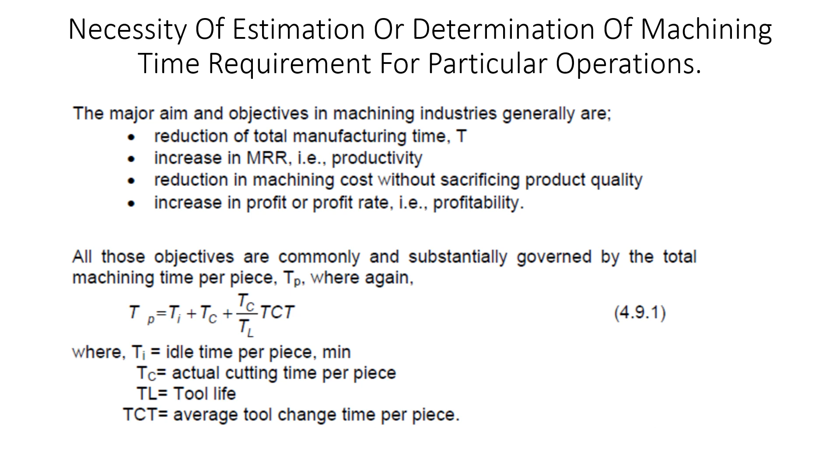Hence, it becomes extremely necessary to determine the actual machining time TC required to produce a job, mainly for assessment of productivity, evaluation of machining cost, measurement of labor cost component, assessment of relative performance or capability of any machine tool, cutting fluid, or any special or new technique in terms of saving in machining time.

The machining time TC required for a particular operation can be determined using two methods: first, by roughly making calculation, that is estimation process, and secondly, precisely if required, by measurement. Measurement definitely gives more accurate and detailed results but is tedious and expensive, whereas estimation by simple calculations, though may not be that accurate, is simple, quick and inexpensive.

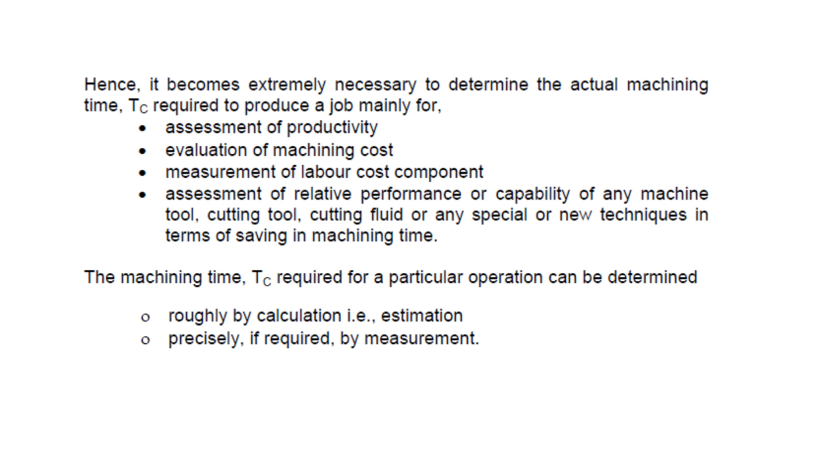Hence, determination of machining time, especially by simple calculations using suitable equations, is essentially done regularly for various purposes. Now coming on to major factors that govern machining time. These factors will be understood from a simple case of machining.

A steel rod has to be reduced in diameter from D1 to D2 over a length L by straight turning in a center lathe, as indicated in figure 4.9.1.

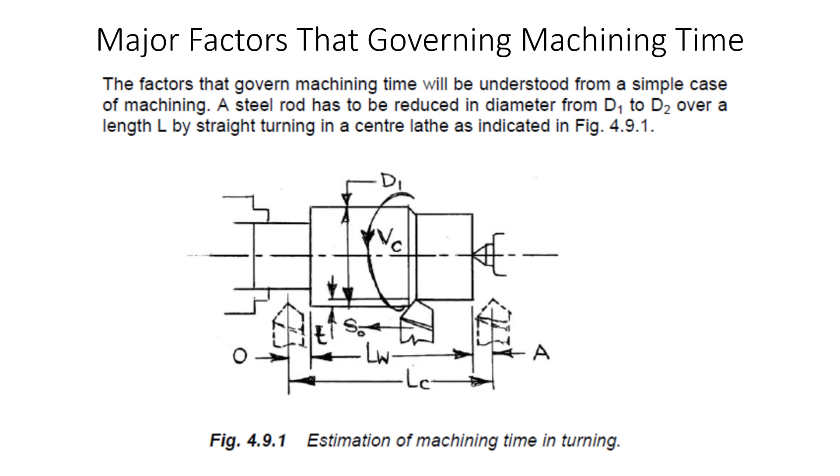Here Tc, the cutting time, is given by Lc by N into S0 into Np, where Lc is the actual length of cut, given by L plus A plus O. A and O are the approach and overrun as shown in figure 4.9.1. Approach is the position where the tool is kept prior to starting any machining operation, and overrun is the length which the tool moves after the part has been cut.

Here S0 is the feed given in millimeter per revolution, and Np is the number of passes required for the diameter to be reduced to D2 from D1. Speed is determined from cutting velocity Vc, given by pi dn by 1000 meter per minute, where d is the diameter of the job before cut. Therefore n, or the RPM, is given by 1000 into Vc by pi into d, the diameter of the workpiece. The number of passes Np is mathematically determined by Np equals d1 minus d2 divided by 2t, where t is the depth of cut in one pass, given in millimeters.

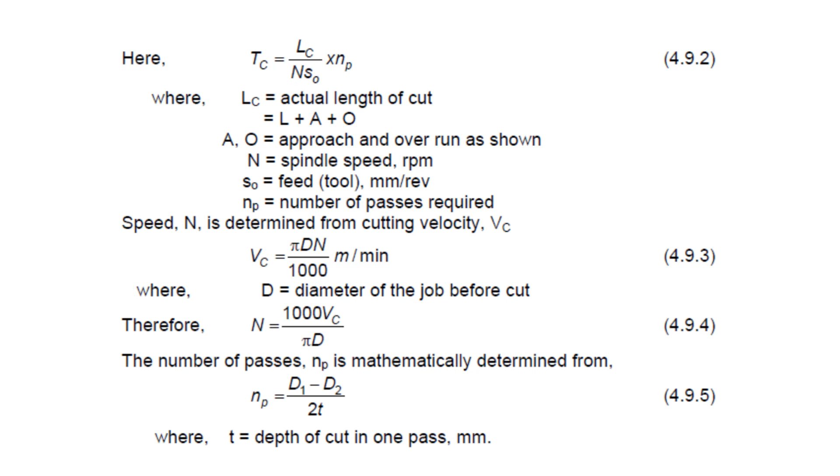However, combining equations 4.9.2, 4.9.4 and 4.9.5, one gets Tc equals pi dLc, d1 minus d2, divided by 2000 Vc S0 T. And for single pass turning, Tc can be written as pi into d into Lc, divided by 1000 into Vc into S0.

Equation 4.9.7 clearly indicates that for turning a given diameter and length, the cutting time Tc is governed mainly by the selection of values of cutting velocity Vc and feed S0. This is true more or less in all machining operations done in different machine tools.

A number of factors are essentially considered while selecting or deciding the values of Vc and S0 for any machining work. The major factors considered for selecting Vc are: first, nature of cut; second, work material, its type, strength, hardness, heat resistance, toughness, chemical reactivity, etc.

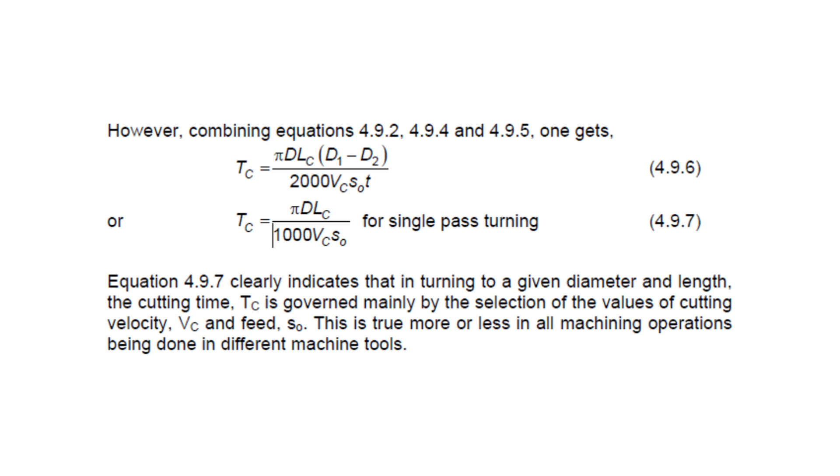Then cutting tool material, its type, strength, hardness, heat and wear resistance, toughness, chemical stability, thermal conductivity, etc. Then cutting fluid application, purpose of machining, kind of machining operation, capacity of the machine tool, and condition of the machine tool. These are the factors which govern the cutting velocity.

Now, the factors considered during selecting the values of feed are: work material type, strength, hardness, etc.; capacity of the machine tool, power, rigidity, etc.; cutting tool material, geometry, configuration; cutting fluid application; surface finish desired; type of operation, for instance threading operation needs large feed according to the lead of the thread; and nature of cut, that is whether the cut is continuous, shock-initiated type, or intermittent feed type, etc.

Apart from the total volume of material to be removed, permissible values of cutting velocity, feed and depth of cut, and cutting fluid application, there are a few more factors which also play a role in machining time.

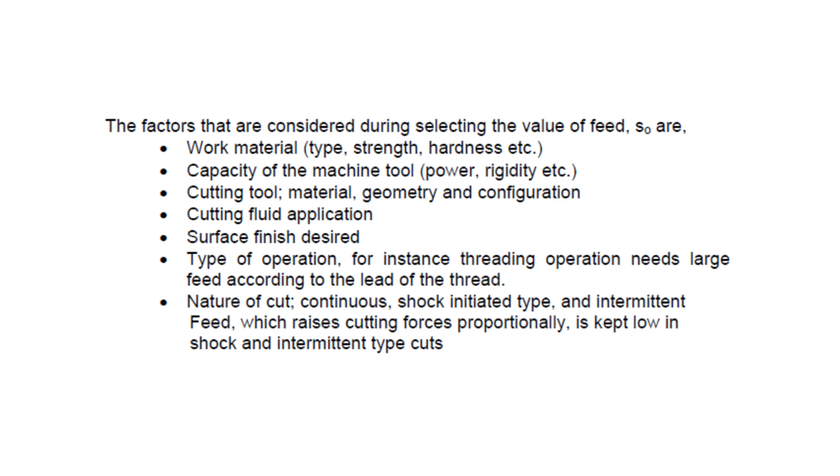Those additional factors include quick return ratio in operations like shaping, planing, slotting, gear shaping, etc. Jobs of odd size and shape, and irregular and harder surfaces like large castings, are essentially machined much more slowly with lower cutting velocity. Some special techniques like hot machining and cryo machining enable faster machining of some exotic materials and even some common metals like steel at higher cutting velocity and feed rate.

Now, estimation of machining time by calculation. The first case is turning on a lathe. Figure 4.9.1, given in the previous slides, and equations like equation 4.9.7 enable determination of the amount of time required for straight turning in a lathe following the given procedural steps.

Determine the length of cut by proper selection of amount of approach A, which ranges from 2 to 5 millimeters, and overrun O, which ranges from 1 to 3 millimeters if required. Select the approximate values of cutting velocity and feed based on the tool and work materials and other factors previously mentioned.

Determine the spindle speed and then fix N as well as feed from the chart giving the list of N and S0 available in the lathe. Finally, determine Tc using equation 4.9.7, that is Tc is given by pi d, inside bracket LW plus A plus O, divided by 1000 into Vc into S0, as can be seen in the slide.

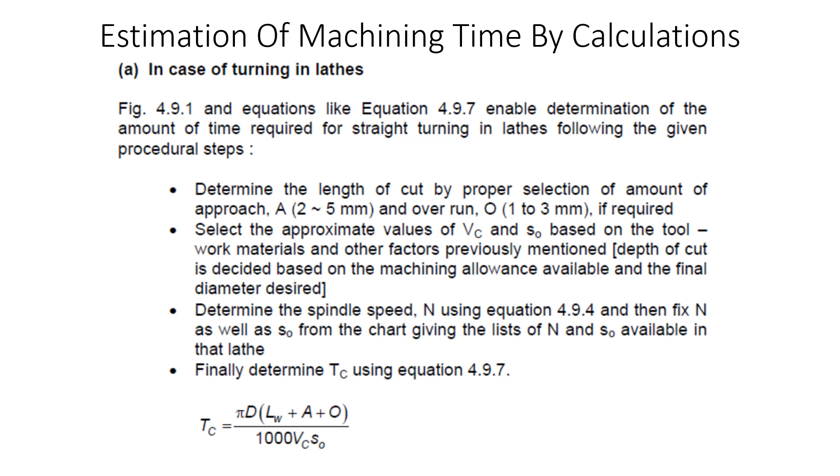Now coming on to an example. For diameter of 100 millimeters and length of workpiece 200 millimeters, approach and overrun are each selected to be 5 millimeters. The cutting velocity is given as 120 meters per minute and feed is given as 0.2 millimeters per revolution. The cutting time is estimated to be 2.75 minutes.

The machining time for facing, grooving, taper turning, threading, parting, etc. in lathe can also be determined or estimated following the same principle.

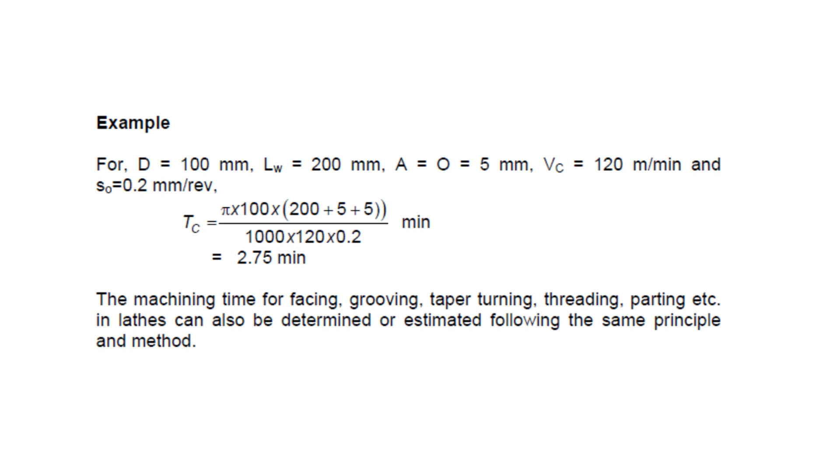Now, second case: drilling and boring. The basic principle and procedure of estimation of machining time in drilling and boring are almost the same as that of turning operation. Figure 4.9.2 shows making a through hole by drilling and boring.

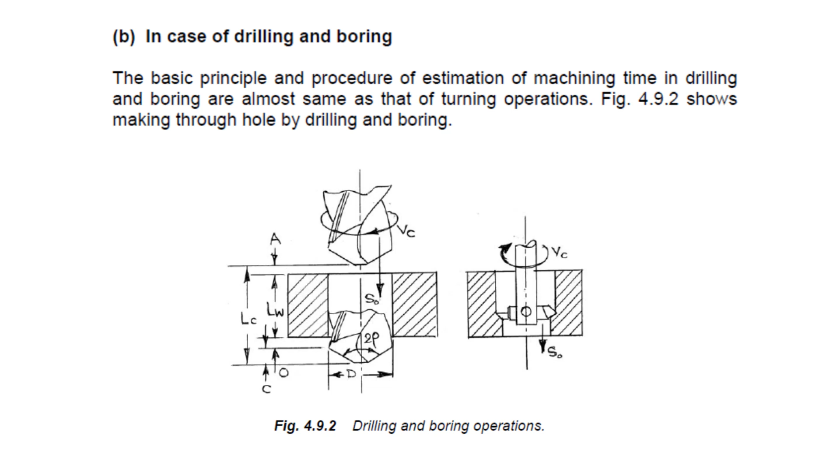For drilling a through hole, the machining time Tc is estimated from Tc equals Lc divided by N into feed, where Lc equals LH plus A plus O plus C. The different parameters shown here can be identified in figure 4.9.2. Here C is given as D by 2 into cot rho, where D is the diameter of the hole and rho is equal to half of the drill point angle.

The speed N and feed are selected in the same way as it is done in case of turning. Therefore, the drilling time can be determined from Tc equals pi d, inside bracket LH plus A plus O plus C, divided by 1000 into Vc into S0, that is feed.

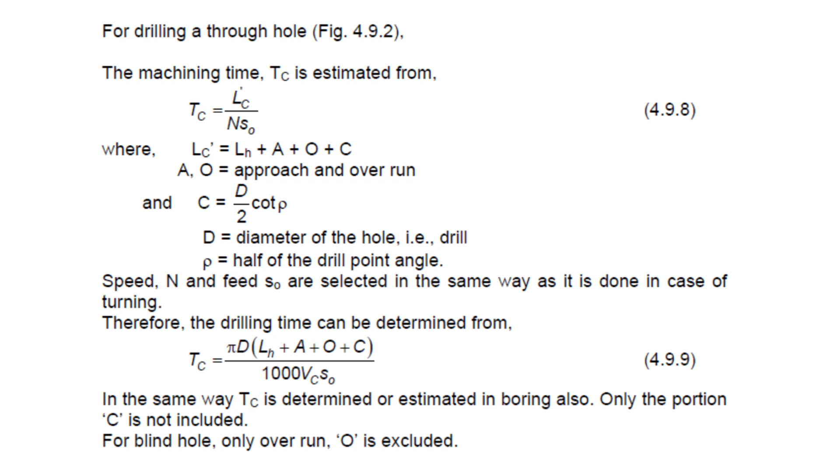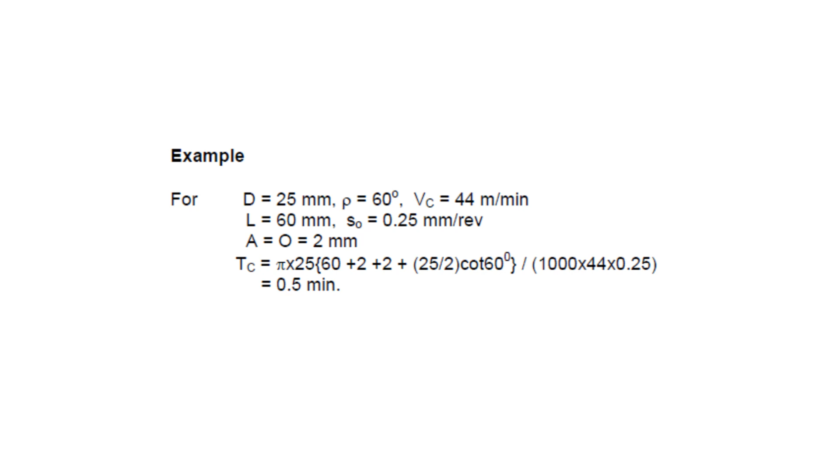Now coming to an example where the diameter of the drill is given as 25 millimeter, the half of the drill point angle is given as 60 degree, cutting velocity is 44 meter per minute, length of the cut or hole is 60 millimeter, feed is given as 0.25 millimeter per revolution, and approach and overrun is given as 2 millimeter. The total cutting time in this case is estimated to be 0.5 minutes.

A third case: machining time in shaping and planing. Machining time in shaping can be estimated using the scheme given in figure 4.9.3, which shows the length of tool and work travel required to remove a layer of material from the top flat surface of a block in a shaping machine.

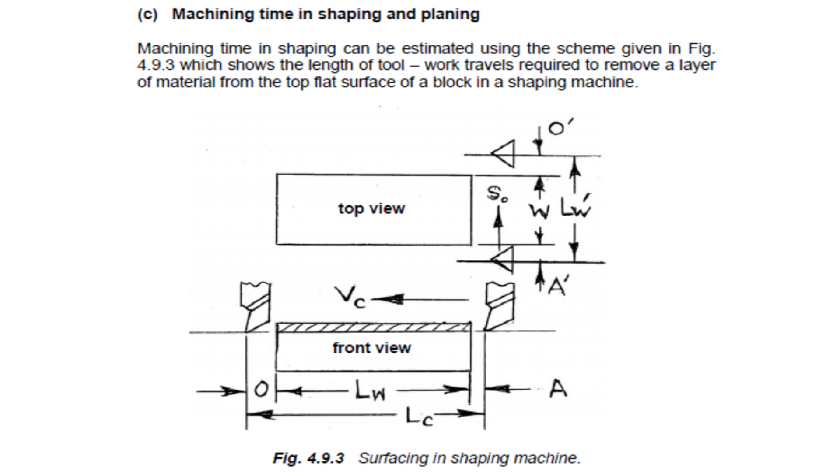Using figure 4.9.3, the total machining time can be determined from the expression Tc equals Lw divided by Ns into S0, where LW is the total length of travel of the job, that is W plus A dash plus O dash, where W is the width of the job, A dash and O dash are the approach and overrun. Ns is the number of strokes per minute, and S0 is the feed of the job.

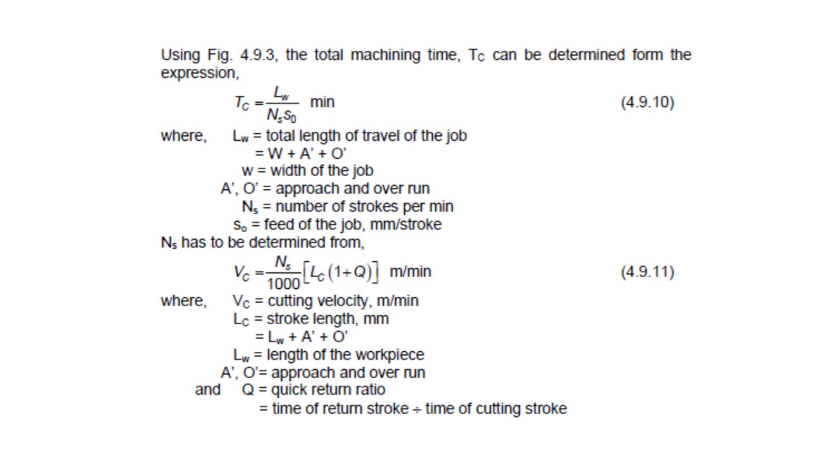Now Ns has to be determined from the equation of cutting velocity, that is VC equals Ns by 1000 into LC inside bracket 1 plus Q, where VC is the cutting velocity, LC is the stroke length, A dash and O dash are approach and overrun, and Q is the quick return ratio, that is the time of return stroke divided by the cutting stroke. Therefore, Ns equals 1000 VC divided by LC inside bracket 1 plus Q.

Practically, the speed available nearest to this calculated value is to be taken up. The values of VC and feed are to be selected considering the relevant factors already mentioned in case of turning. An example is given for understanding this better.

Now, machining time of planing operation in planing machine is determined in the same way, because the only difference is that in a planing machine, cutting strokes and feed travels are imparted to the job and the tool respectively, just opposite to that of a shaping machine. Besides that, though both shaping and planing are reciprocating type, planing machine may allow higher cutting velocity.

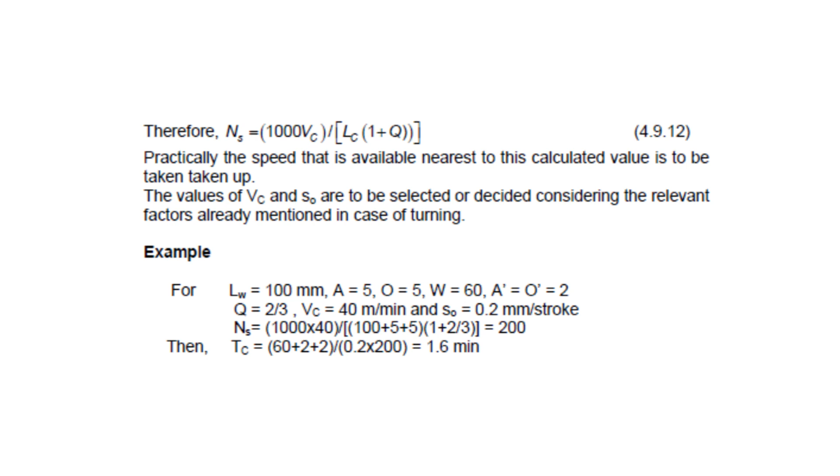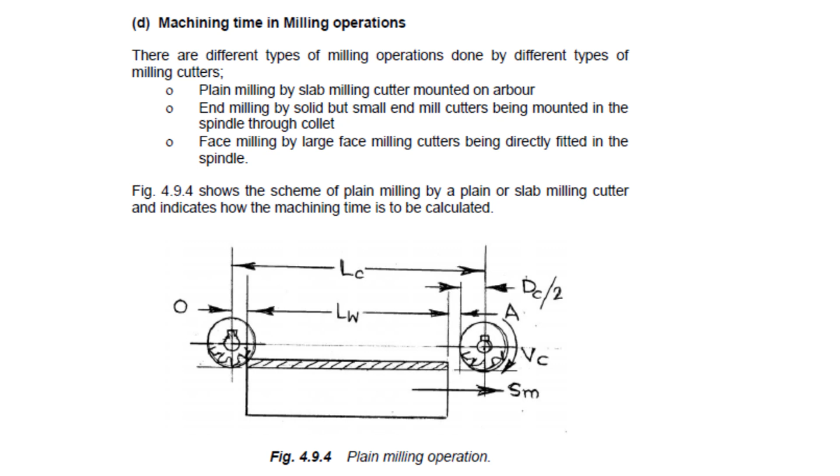Following the figure, the machining time for plain milling a flat surface can be determined as TC equals LC by SM, for the job width when it is lesser than the cutter length. Here LC is given by LW plus A plus O plus D by 2, where LW is the length of the workpiece, A and O are approach and overrun, DC is the diameter of the cutter, SM is the table feed, S0 is the feed per tooth, ZC is the number of teeth of the cutter, and N is the cutter speed.

Again, N has to be determined from the cutting velocity equation, that is VC equals pi DC N by 1000. VC and feed have to be selected in the usual way considering the factors stated previously. Since milling is an intermittent cutting process, VC should be taken lower than that recommended for continuous machining like turning. Feed should be taken reasonably low, within 0.10 to 0.50 millimeters, depending upon the tooth size, work material, and surface finish desired.